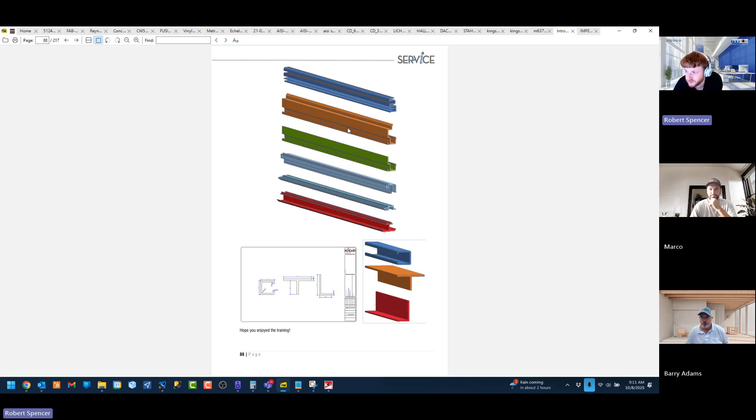Okay, so the last thing we did was we drew this very fine looking C profile and extruded it into something like this. Any chance you guys had the chance to draw anything else or try one of your own?

It's been since Friday, but I had a very busy Monday and Tuesday, and had a meeting right up till 9 o'clock this morning. It's no problem.

Okay, well what I want to start off with here before we move on to 3D stuff is importing. Let me find my example in your training documents, just a second.

So here in your training material for 2D, you're going to find a folder full of profiles. You can use these to practice if you want, or better yet, you probably got your own systems you wouldn't mind creating. But you can use them if you want.

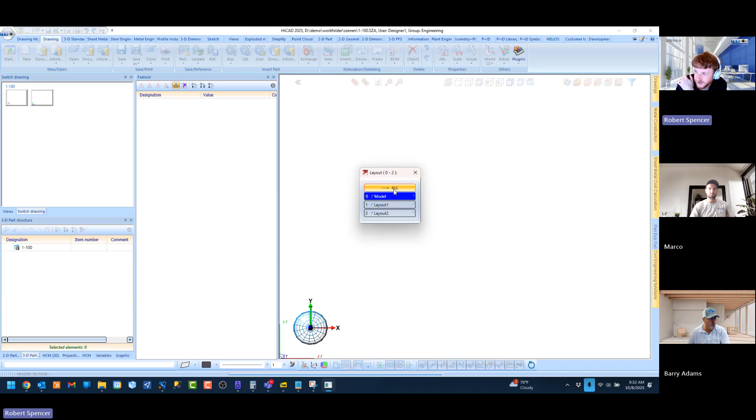I'm going to switch that back since I didn't mean to change anything - I think I clicked on something in there. I'm going to say okay, and it's going to ask you: do you want everything, just the model space, or all the sheets will be listed underneath here?

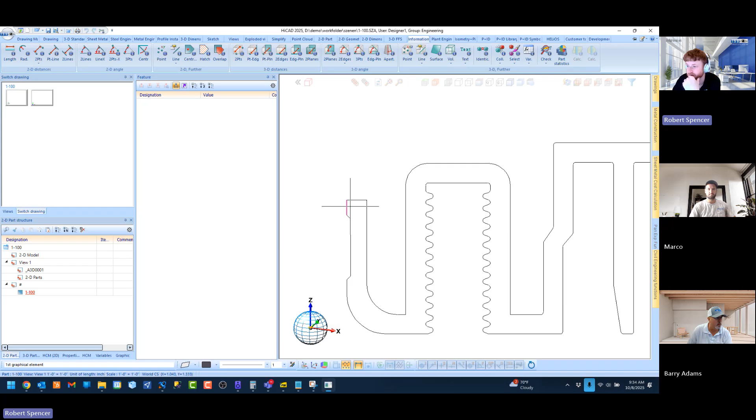Yeah, so I think it looks okay on my side. If I was to read something, I don't actually know the specs on this, but 1.5 sounds about okay. If it had said something like 0.00001 or some really small or really large number, then I'd know something was goofy.

Now from here, the steps are pretty similar to what we did last time. Who might have an idea on what we would do next? What are we trying to do? Oh, extrude that profile? We're trying to save it to the library and then, yes, basically extrude it.

Forget that, we'll do it. It was in sheet metal, right? Make it a part somehow. Steel - it's in steel. But what might we need to do first?

Gotta save the profile and import to the library. But what about the positioning? At least on my screen, that looks pretty whack. Yeah, get like a center point and centroid kind of thing. Oh yeah, we gotta do the centroid deal. We gotta move it to it.

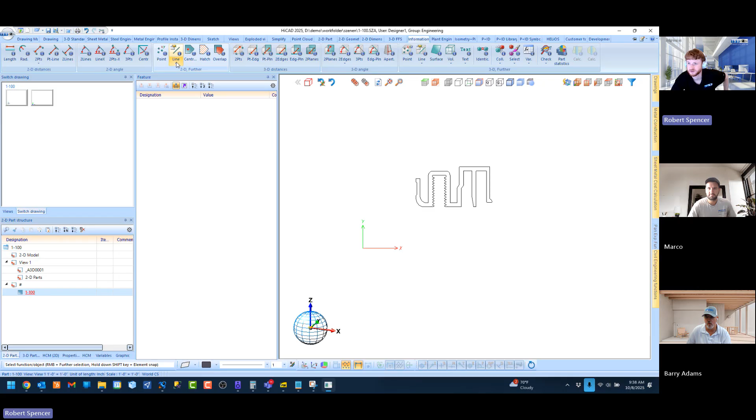So I'm pressing sort GE. I'm not seeing it - it doesn't look like it's checking for closed polyline or open, it doesn't give you feedback. The way to know is if it wasn't enclosed a minute ago, then you click the button and check it again - I bet it's closed now. Okay, so that's under 2D geometry. Correct, gotcha. And then you ran over to the information tab after that.

All right, so now we need to get this located near the zero. Correct, yep. And I don't remember - but at least on my screen, I want to rotate it first. So, who wants to try to rotate it without instruction?

In 2D geometry, see we got transform, rotate. Let's go over one more because we don't want to rotate just one line, we want to rotate the whole part. So transform is for one line - if you're in the 2D geometry ribbon, you're drawing lines, rectangles, and circles, or manipulating them. You're not working at a part level, you're working at an element level. When you move over to 2D part, you're now working at a part level - meaning moving a whole block, not just one line or two lines.

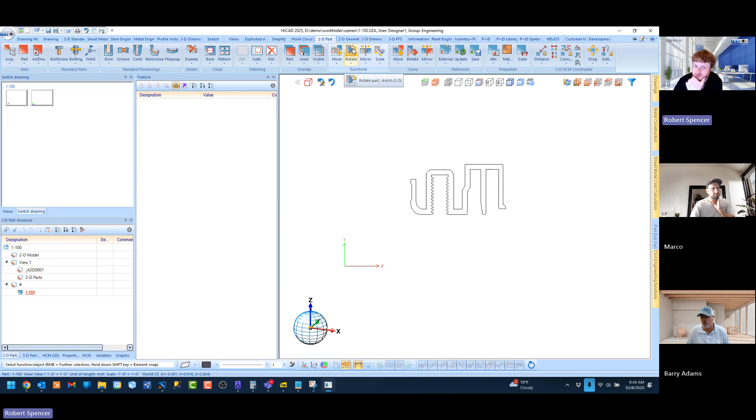So clone - well, not clone, we just want to move or copy this part. So here we got rotate, and here we can also use the right mouse button.

I'm stuck. I think I accidentally pressed move and I can't get out of the command. If you're in a command, try middle mouse or escape. Escape just brings up other options, middle mouse does the same thing.

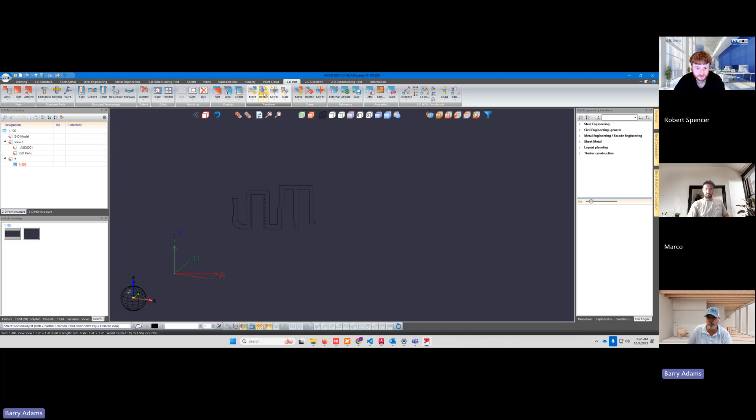Now we want to pick a point on which to rotate, right? An axis - yeah, just pick, it doesn't matter so much here. You just click a point and you can quickly flip it. Regardless of the point you select, it's just going to rotate about that, so here you just want to quickly move it.

I would put - so the way this profile works is that the teeth are going up and facing out, so I would put it like that. That's just because I happen to know how the profile system is used. So basically 180 degrees - no, just 90. You want to have it going about like that, so stop and just click that.

Yeah, all right, maybe next time I'll have this color coordinated better. I'm not good at color coordination. What do you mean, what about the color? So you can see I've got black on black for my options, so it's difficult for you to see. I can see it fine actually, but yeah, you can always change that if you don't like it.

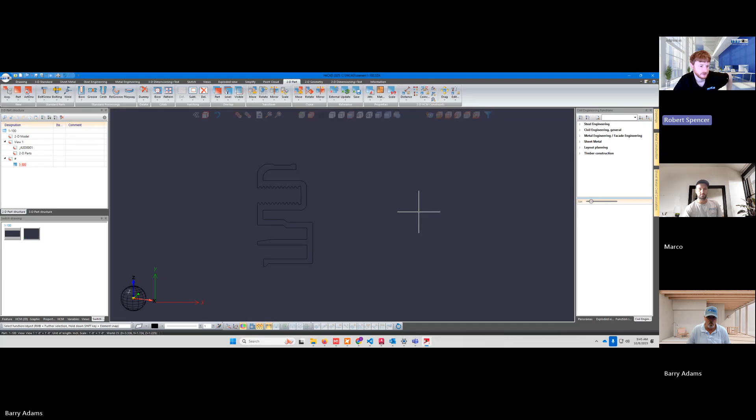Now, Barry, you got it rotated fine, but you're going to want to move it closer to the origin and probably have it in a strategic position. You can either pick your own choice of a position, or if you wanted to calculate the centroid, you could do it that way as well.

It'd be easier to calculate the centroid, wouldn't it? More proper anyway, right? Well, yes and no. I happen to know how this is used, and it becomes very convenient for inserting it into the model if I'm grabbing it by this point right here. That's right. You explained that last week, I remember.

Because, say for example, you have a flange going there and then over to here, and then of course they're going to be... okay, it doesn't like that because so many other lines are so close. So I'll just do this. So the top of the panel is here and the flange goes like this. So if I can grab it right there, it makes it easy to stick it right up in there in the 3D model. But that's just because I have experience with this.

I wouldn't have expected you to know that. Now, can we go in later after the fact? Like, let's say we do it by the centroid and we want to change it to the way you're doing it with a reference point out there in the middle of nowhere. We can do that after the fact and just resave it. You can go back in. You do have to resave it, but yes, that's fine.

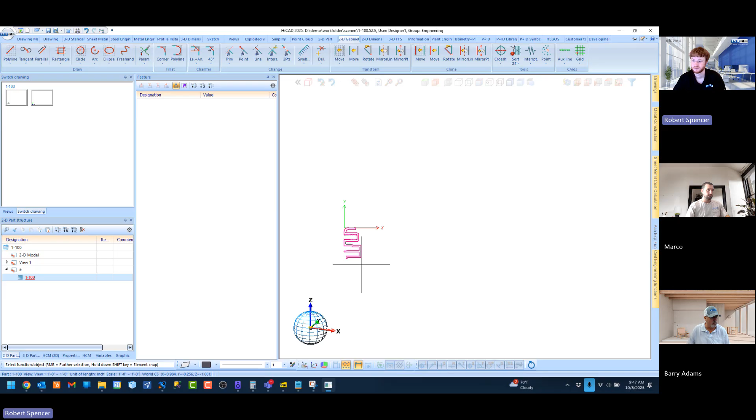Okay. So I'm going to take this one and I'm going to say transform again. And here I'm going to do a quick theoretical calculation to grab it right here in the corner. And then I'm going to use my A key on the keyboard to snap to the absolute position before I'm ready to save it.

Quick way to get to origin. What was that, Marco? What's the quick way to move it to the origin? Well, you start it with any type of transform. Yeah, I'll just grab it here, and then you hit A on the keyboard, and you can key in either 0, 0 or an offset from 0, 0.

Gotcha. How did you do it? You went over and left clicked on the 1/100, or right clicked on the 1/100? Move, yeah, I started transform here. Okay.

You can also click on the part. I like that, do it like this. You might see me come over to the structure more often than on the part, because sometimes in this case it's very simple, but if you have a lot of parts surrounding the one that you want to get, there's the risk of clicking on something other than what you're trying to click on. But if you're over in the structure, you can easily pick one particular part.

You're doing the transform move. And what'd you do after that? So if you got material sign and you got it moved into the correct position and everything is fully closed, you're ready to save it to the catalog. I'm still trying to move it. Oh, okay, no problem.

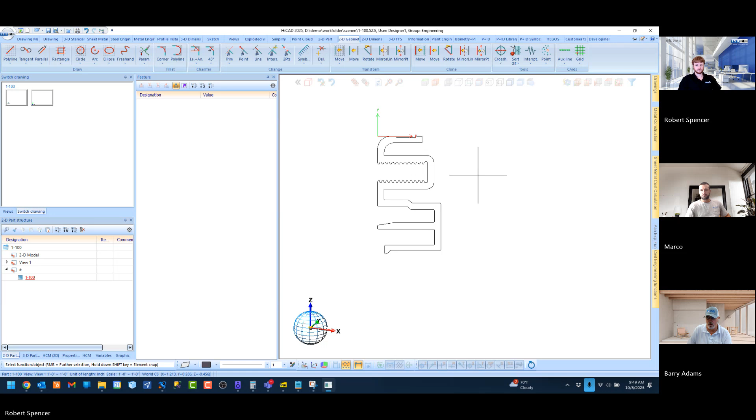So transform, move part, sketch 2D, and just pick a point and move it. Yeah, you can pick any point, but what I was saying is if you strategically grab it in a position, you can then line that up with the origin.

For example, I did a theoretical. Okay, you did a line there. I said theoretical, and I clicked... How did you get to that menu? Enter, when you hit... remember it's your enter options. Yeah, I remember there's an enter and a space bar one. Yeah, enter is for the options. Spacebar is usually to pull up like a key-in dialog, or if you want to type in a coordinate or a value or something like that.

Just gonna go. Just press A. Yeah. If you've already calculated your theoretical and you have the cursor grabbing it by where you want, then you can go right away to the A key, for example, and give it 0, 0, or if you had an offset value, you wanted it to be on the origin but a little bit to the right, because that helps you get it right in the position you want. You could also do that, but in this case, I'm just going with 0, 0.

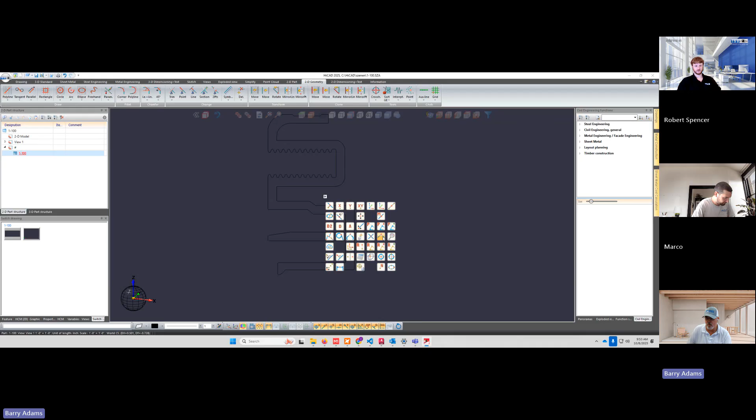And come over here to the theoretical intersection point, right? Correct, yep. And come over here, and I'm going to select this line, and then this line, and that gives me a point, and I don't know what to do from there. No, it doesn't give you a point, it means you're grabbing it by that theoretical point.

You're now moving it around with your cursor from that point. Now, you don't necessarily want to move your cursor. You see how it's blue? You're grabbing it by that point right now. Now you want that point you're grabbing it by to be on the origin. So you can go right away, you can hit A on the keyboard, which is the shortcut for absolute. And you can say 0, 0, enter. There.

Okay, so it's these procedures I've gotta get down. So I see how it's referenced from there now. I understand.

The first time I was doing something like this, I think it took me an hour and a half to find the centroid button, because I wasn't remembering to go to information. I was sitting here looking for it on 2D geometry or part or something. And since my trainer was in Europe, this was like 4 or 5 in the afternoon my time, so 11 p.m., I couldn't reach out during his evening. And everybody else had left the office, so I was literally just sitting there trying to find the button. Oh, so I know what you mean.

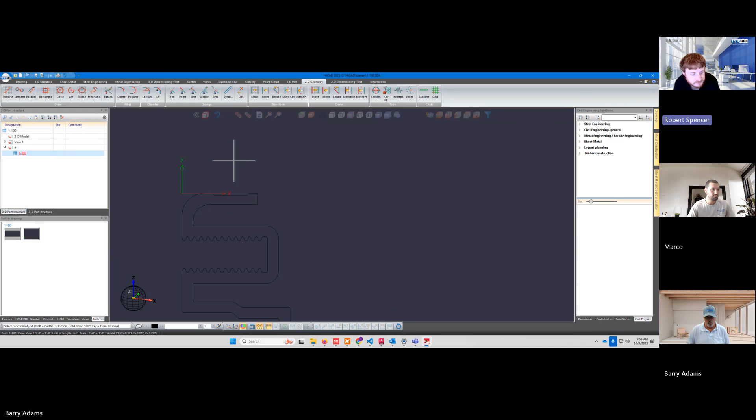Which, I have zero real life cladding experience either, but I think I've worked through enough projects with customers now that it's maybe not such a problem. But with the glazing, I'm just a little weak on the real world experience side. But I can tell you the commands. I just can't answer those questions, like hey I got this particular system I'm trying to create, and it works like this, and then they ask a really specific question on that particular system. I can tell you the command, but you gotta tell me exactly what you want to do. I can't help you on the ins and outs of your system.

I just got to remember to press enter. Yeah, I need to remember that too. Enter, when to press space.

I'm used to finding similar type commands either at the bottom of the screen near the snaps, or up in a toolbar. Maybe not so much under the enter.

Yeah, there's a lot. There's people that have been using AutoCAD for 30 years and they still don't know how to use all of it. There's enough there to keep you occupied for decades. This stuff's a lot. Correct, yeah, similar.

It's definitely a very powerful 2D tool, no doubt about it. Talking about 3D, their 3D is okay. We just try to automate. Our thing is automation, and Autodesk has Inventor, maybe a little bit of parametrics there.

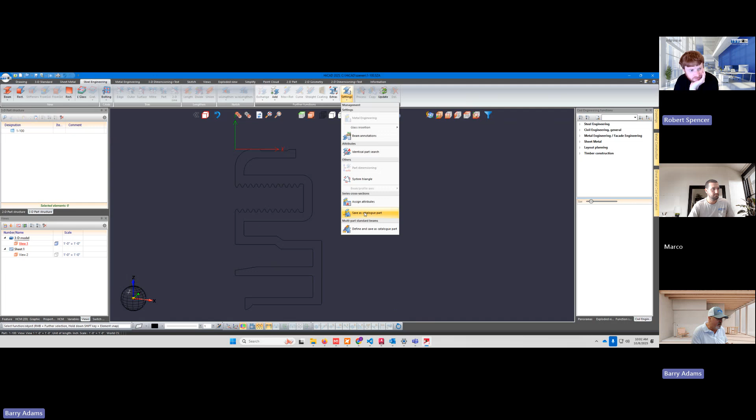And this is kind of a hard one. I remember struggling with this location a little bit myself, so I have to write it down. I would just probably write it down, and maybe you can write a quick procedure on how to save a profile to the catalog. I know I got the pages in the book, but you could shorten it a little bit to make it quick and easy to read. Simple, like 3-4 steps or something like that.

All right, so I did that. Hit the drop down, save as catalog part, all right, do it again. And look, it's talking to you. What's it saying at the bottom left? Well, select RMB, further selection. So do I need to highlight all of it? It's saying select part. Right mouse button will give you additional options, but really you just want to click on the part.

Okay, like that. Now remember the two different parts to the catalog. You've got the directories, and then you've got the database that manages the directories. Does that sound familiar? Yeah. So these are, the first part is the directories. So where would you like this part file to be saved?

And I believe last time we used the example folder, but here's where you could create a new directory later on when you're actually saving profiles you want to use in your work. You could organize with some special folders with whatever name sounds good to you. I say let's make it easy right now, fine with example. Let's just use the example folder. Yeah. Okay. Okay.

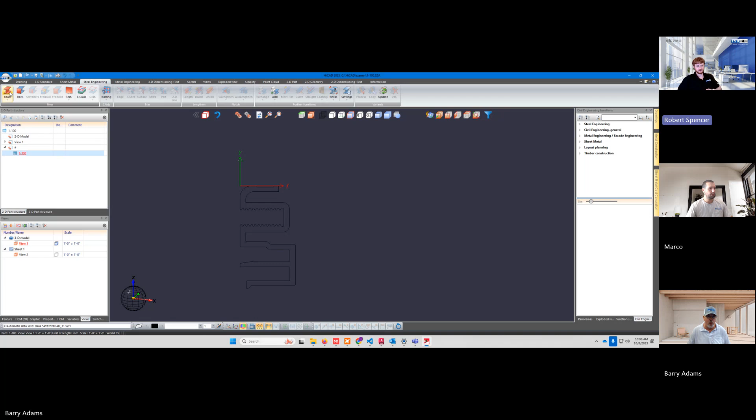Just hit the button. Oh, what happened? You have an HEA profile selected there - it's remembering. It's either a default or it's remembering what you might have done previously. I don't know exactly what you've done, but you just want to go find a different profile, right? You don't want an HEA 200.

You want to go one more button over, the little book looking thing, which means your library. Were you looking all the way up to the right of the HEA 200? Next to the arrow? Yeah, that one.

Now we have to find it. So I would start by collapsing everything. You see that button at the top left where it says collapse all? Your other right, yeah - collapse all, just collapse everything because we're not working with semi-finished beams and profiles.

So we want to go to, if you remember what table you saved it in a minute ago, it was in factory standards. You might not have noticed that. Factory beams, and then we're in series.

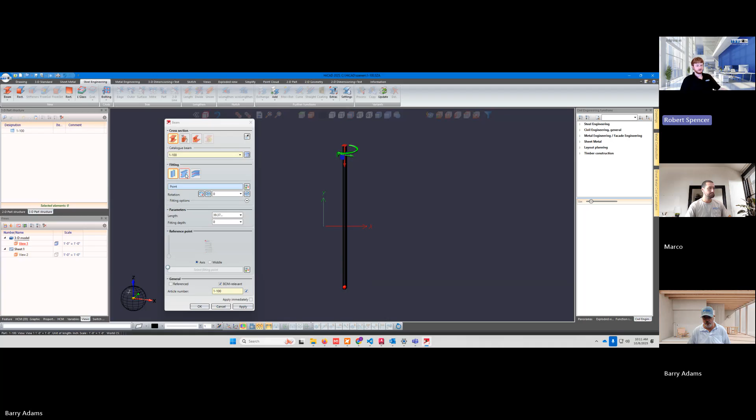Basically it's going to follow the Z plane, based on a standard world coordinate system, which is currently active. That's why you saw it being extruded straight up.

If you go to 2 points, now you need to give it 2 points. So I could select here for 1 point, the end point here. Actually, you don't have to necessarily click there—if you come out to your model space and click somewhere, or if you had a precise location, you could go to enter from point and click on something.

But now you see you got some snaps happening here. You got an angle system, which you can go down or to 0. If you wanted to key in a specific location, you could say spacebar—this is just for the angle, then you give it a distance.

Okay, distance then angle. So let's just say distance then angle, so 12 space 0. I think we're on 0 now—yeah, we're on 0. So that's the format right there: distance space angle, distance space angle. Okay, then hit OK.

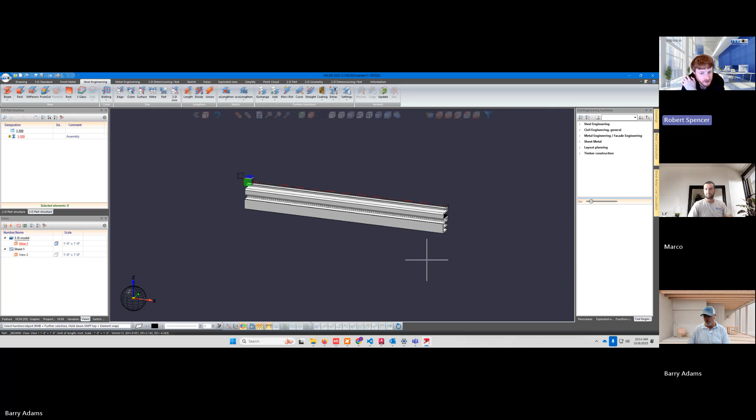So my suggestion here would be to find a few minutes whenever you can, either repeat this one, try one of those other profiles in the folder there, or better yet, try to find some of your own and maybe do an import and try to save something to your library. I start getting F-track and H-track assemblies in our library.

Yeah, I'm trying to manipulate this and just view—struggling with the view controls. Upper right, there's... yeah, that's the ones I like. Up here, yep, you can't just use your mouse and spin it around like... actually you can—you got to hold down middle mouse and rotate, and it'll rotate. Oh, I swear I was doing that. Oh, I was pressing shift and doing that.

Now, if you hold control and do that, you will pan. Okay, hold control. Okay, I like that. That's a good profile.

So yeah, that'll be something I try to do as soon as we're done here today. Okay, unless you want me to do it now. But yeah, that's a very important thing to do repetition on. Yeah, correct. No, I'd say if you find some time of your own, later is fine, and we can move on to some of the other things we got to talk about.

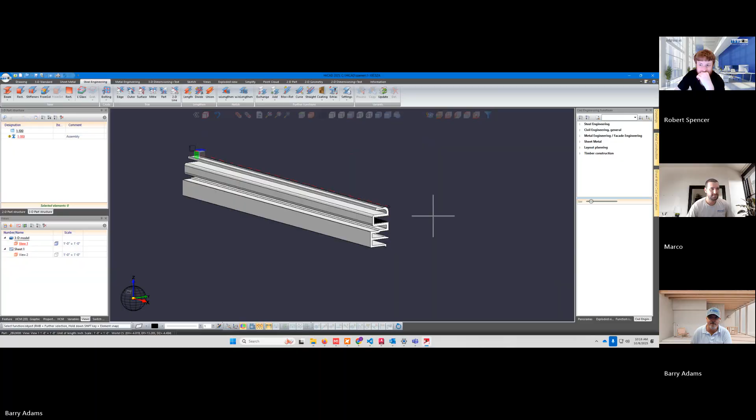All right, let's see, I think that kind of concludes the 2D portion. So let's move into 3D.

So for 3D, of course we're not going to be focusing on 2D part, 2D geometry, or dimensionings. We're going to have 3D standard, 3D dimensionings, or sketching.

So your basic commands for 3D are 3D standard, 3D dimensionings, or well, you got to create sketches, right? So for 3D, we have a whole ribbon bar for sketching, whereas for 2D, the equivalent is basically your 2D geometry in a way.

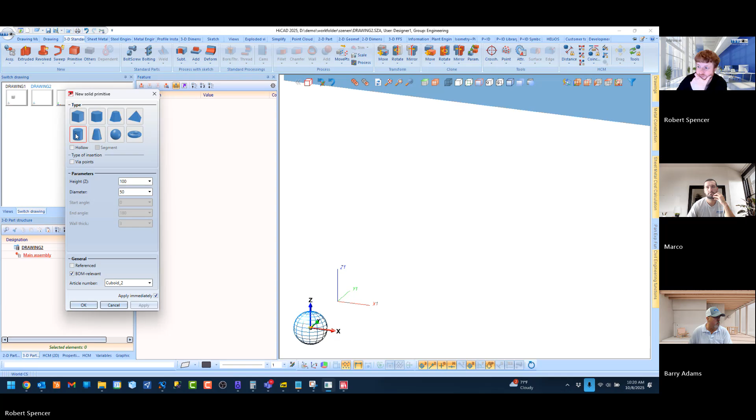I have a cube and a cylinder. So let's say if I want to just close this, I come up here and hit the close button.

You can also say close, but that's an extra click, so I like to use this one. Do you have that button there? If it's not there, we might need to add it. So you just say close, and it'll prompt you if you want to save it.

You can return to one of the other ones if you want. I've only got none, so I have to start a new one. Yeah, if you have nothing here, kind of like this, then we need to start new.

Okay, so we are going to create a very simple 3D part in drawing, kind of like we did a very simple 2D part in drawing.

To create this, you have two methods. You could go with the cube, like you've seen me do, and set the lengths here of 4 3/4 by 4 by 1.

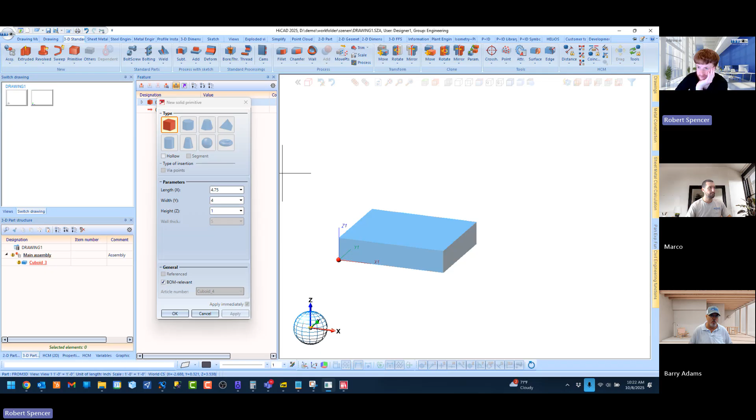So you can do it this way, which is okay, but I find myself maybe more prone to want to go to sketch.

Come over here, start a rectangle, say spacebar, and then say 4 3/4. Oh, I hit enter too fast. I'm a little bit slow.

Yeah, me too. I'm in Sketch. 3D Sketch? No, let me explain the difference.

This one is a 2D sketch in 3D space. This one is a 3D sketch in 3D space, meaning if you had a sweep, a unique sweep or something you wanted to do, you could go here. This allows you to, in the same sketch, work on the XY plane, YZ plane, or XZ plane. You can interchange back between the three standard planes.

Whereas this type of sketch, you pick one plane you want to click on, and then you can draft on that plane, for example.

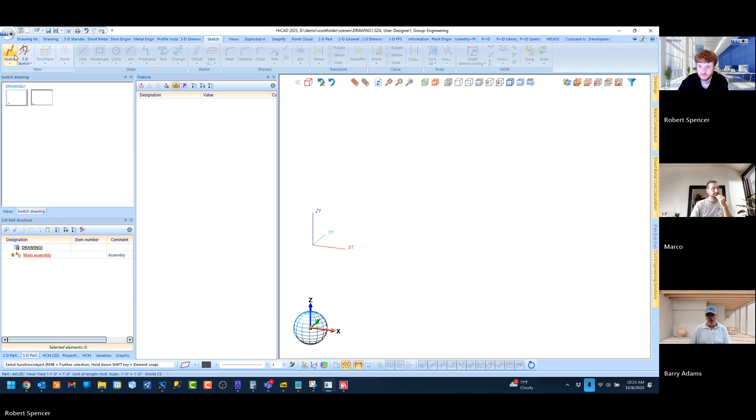Okay, there it is. Now everything gets populated. And say the XY plane here, and then your rectangle's right here.

So until you pick a plane, you may notice that your commands are not available, only create new sketches. Yeah, that's what I missed. So you gotta pick a plane and then pick your tool.

I'm gonna go ahead and create that, and rectangle, here's where you're typing in the space bar. Same thing, just like 2D, you hit space bar and key in the values. I'm pressing space bar, but I don't see anything. Oh, maybe I should.

All right, I've got a bunch of stuff going on here. Okay, you want to share? Sure.

I did pretty good, I think I got it drawn out both ways, cuboid and extruded. Yeah, I was trying to, hey, the space bar wasn't coming up. So can I delete all these and try again?

Yeah, so what you have now, look over at your structure. You have one sketch with two rectangles on it.

Now you could delete the sketch and start over, or you could just delete the rectangles and start over in the same sketch. I'm fine with that.

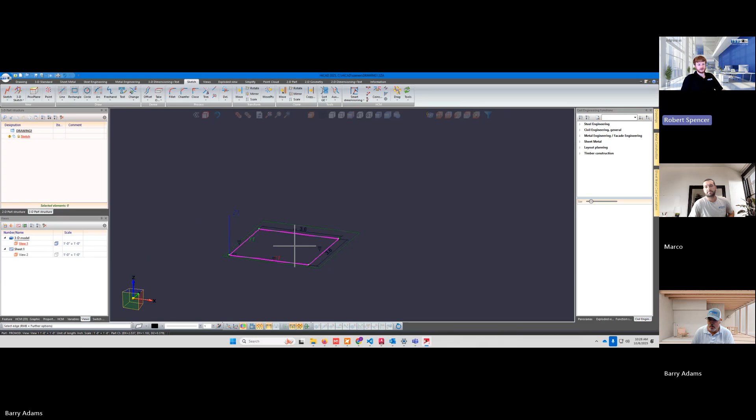Now you delete the whole thing just by clicking one line. Nice.

I don't know if you noticed in that same menu, there is also an option for deleting in a rectangle. So you could then drag a box around an area and delete the elements inside that.

So I'm looking at the plane I'm working on. So we're still have that. This is the, yep, right? You're looking at the plane with no elements drafted on it. So it's just a plane.

So rectangle. Now, I was going to start it right here at the zero. That's fine, and then come out like this. I was trying to hit the space bar. Do I hit it now before I left click, or do I left click and then hit space bar? No, you don't click at all, you just hit the space bar. That's what I was missing.

All right, so we're going to do, what did you have? 4.5? 5.4? 4.75 and 4. Space 4. Why does it say 5.1? Oh, that's where mine, for sure. I think that's where your cursor was.

Let's escape out of the commands now. Escape or middle mouse? Okay, middle mouse. All right, so there it is. I've got 4.75 by 4.

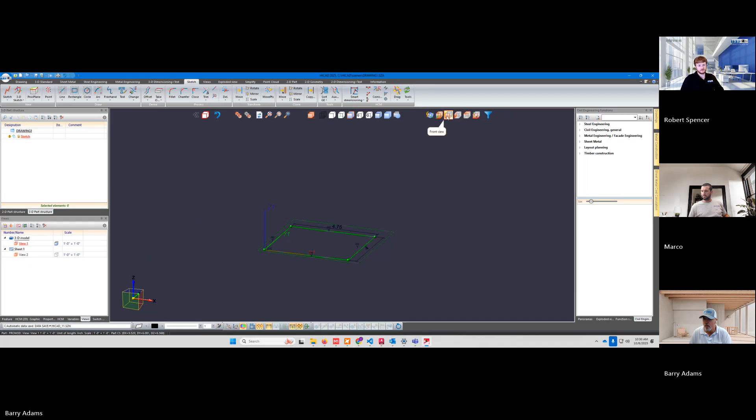So just click them one by one real quick so you can see what they do. So this now is front view. Since our plane is on the XY plane, we're looking into the X. It was the XZ vantage point, the XZ plane at that moment.

One of these? Well, I'm not sure what you're trying to do. What are you wanting to do? Whatever you want me to do. Oh, well, we're just going to continue modeling by extruding this into a part. Okay, yeah, I would like an ISO view. Okay, so the button to the right of that. Okay, got it.

All right, you good over there, Marco? Yep. Got my cuboid, okay.

In 3D standard, maybe you already found it, but the extrude button is right here. You're in 3D standard, correct? I actually just right click the part, and I think there was an extrude on there as well. Yeah, would it be under transform? No, that's under one right there, new? Is what I used. Yeah. Okay, I see. Yeah, you can do it this way too, that's even easier. That's what I thought.

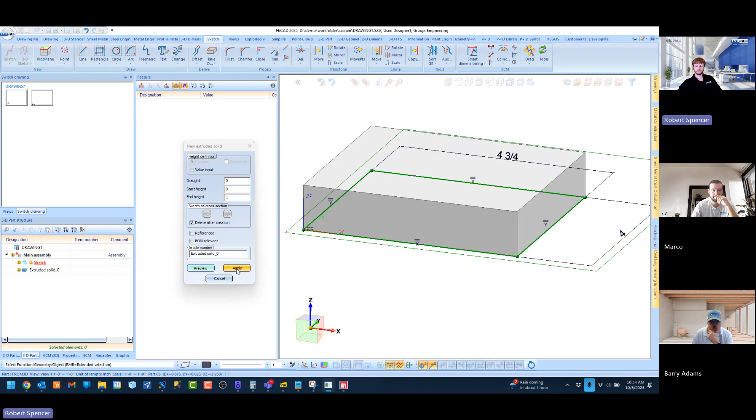Okay. And you see you get a feature step now.

Yeah, I'm not seeing that third window that you've got. Well, I had it down here with everything else, and I wanted to have it here, so I just dragged it over. The reason is while this is a simple model, we'll have a few steps by the time we're done, but when you get to building a parametric facade, you're going to have hundreds of steps here. If we're doing it right, this list will start to get long on you. So that's why I opt for this most of the time.

Now, you can return to this. There's a couple ways to edit this. Notice that when you click on the feature step, these parameter values can be double clicked and changed.

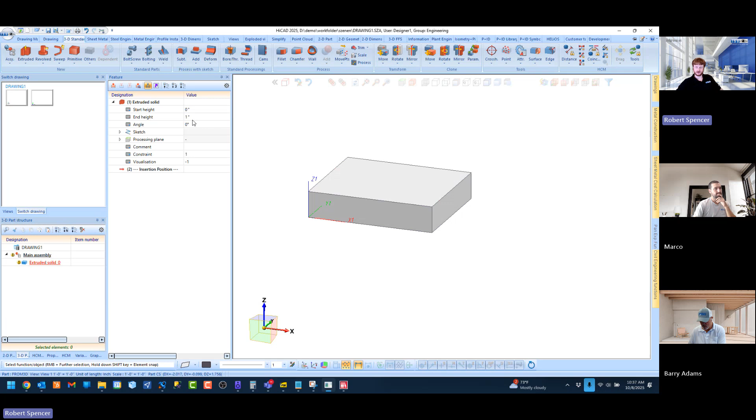Now, let's say these parameters were not created when you made the sketch. I'm going to double click this sketch to come back to it. Let's say I created sort of a dumb sketch without any constraints or values. It still builds the part, but when you highlight this, you see those values don't appear, because they were not created. If you don't create these constraints in the sketch, then you don't see these values. You see how now the length and height are gone.

You can always double click your sketch to come back in and, for example, create them with Smart Dimension if you hadn't created it before. So in order to highlight the feature and actually see values, you would have had to create your sketch using Smart Dimensioning for those values to be available, is what I'm trying to say.

I think I lost my values. My wife tells me that all the time. But seriously, I lost my values.

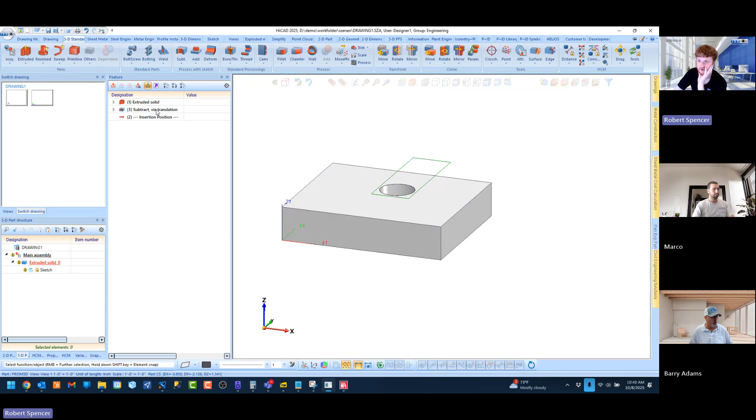It's a hole, not necessarily a bore. We have more capabilities by using the bore command instead of just the hole, because you've got all these different things you could do: threading, countersinking, counterboring, slots, and you can reference standards if you want to. Whereas a subtract is just a dumb hole, basically. Using the bore, you have a smarter command behind it.

And when you go to do your annotations on your drawing, a bore is going to give you a diameter symbol, whereas a subtract will just give you a value of the width of that hole, the diameter. But a bore will give you diameter and depth.

Yes, I believe so, because there'll be a depth associated with it. The bore you can also say not necessarily all the way through—you can also say subtract with depth too. So you've got two subtracts: subtract all the way through, and subtract with some kind of depth value.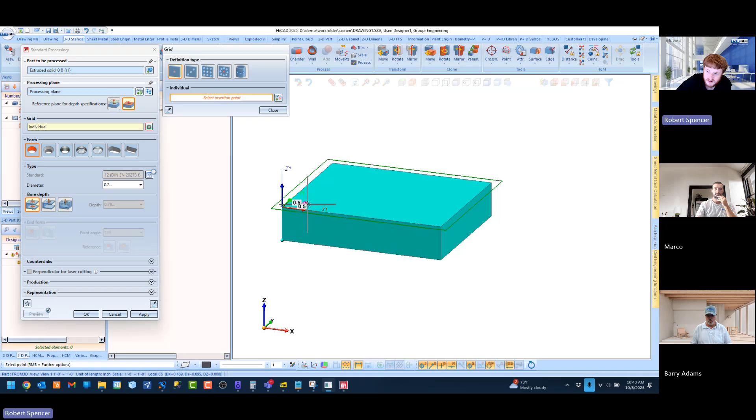I tend to always want to place this at the bottom left—I want the X going left to right, and typically the Y going bottom to top. However, you can take your pick, you can do it like this if you want to. No, I like the way you've got it—yeah, it makes the most sense to me. So you can click that.

And now it's asking for a location, X and Y. So I have one hole as my selected type here. Notice you've got lots of different, we'll say, arrays or definition types here, or I could come over here to say a grid—some type of grid here—and you see now I'm seeing four in my preview. Obviously not to the right specification, but it is starting to respond.

Here's where you could say 2 in the X, 2 in the Y—that is correct to what we want, I just don't have the right distances in yet. Here's where you can set your pattern. Is that creating the pattern here? Okay, so let me look at the drawing—2 and 3/4 in the X is what we want.

So now it fits, at least in that direction, on our part. And now we just need to say down here, I believe it's 2 in the Y. We want that pattern, and we're going to go 2 and 3/4, and 2.

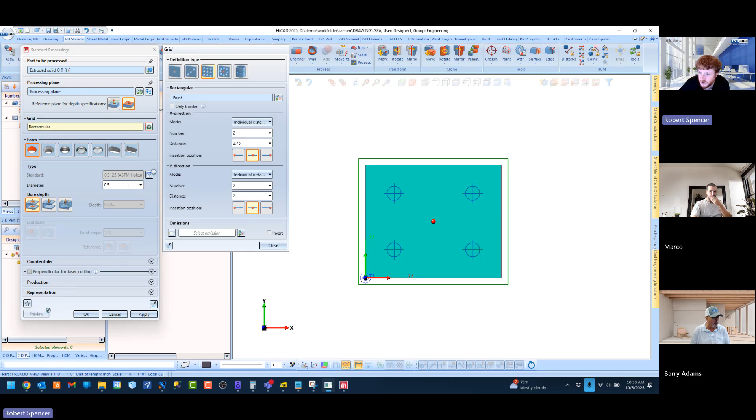And you see the preview is adjusting per the input here. So once we have everything right, all we need to do is say apply, middle mouse, or OK. And the holes will be created and a feature step will be added to our list.

All right. And as is typical, you can return by double clicking. You can come back into this dialog.

What are you double clicking? I'm double clicking on the feature step that was created. Oh, your feature step, gotcha. Yeah, you just double click and you return.

You can also expand, and here, for example, here's your value. If you wanted to say, no, I wanted it to be 5/8 instead. Okay, I like that.

You'll find that I'm expanding this to find something before double clicking in most situations, because usually it's just one value I want to change, which is usually not so buried, depending on the complexity of the feature step. You see here even a little bit like the values, but things are starting to get a little bit buried here.

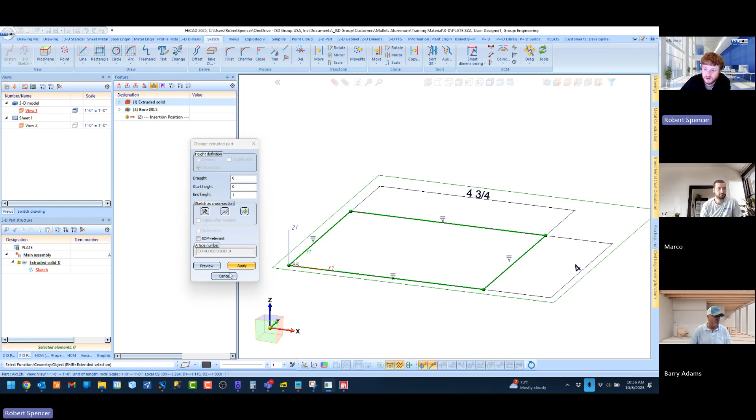We kind of breezed past this when we started. Before you create it, you could give it a unique article number rather than just extruded solid 0. If you've already created it, you can simply come over here, double click, and you can change it to say plate or something better, something more appropriate than just extruded solid 1 or whatever.

Okay, let's now, you mentioned thread a minute ago, because now we actually want to put, I believe it's 1/2 13 thread here right in the middle. So we're gonna go right back to this multifunction command, bores and threads, that we just used a moment ago.

And you can get that via right mouse button, or you can also find it up here in your ribbon. I like that right mouse button. Yeah, I do too. First thing you do, let's pick a plane, it's going to be the same one we did before, this time we're going to come over to this form, or this type.

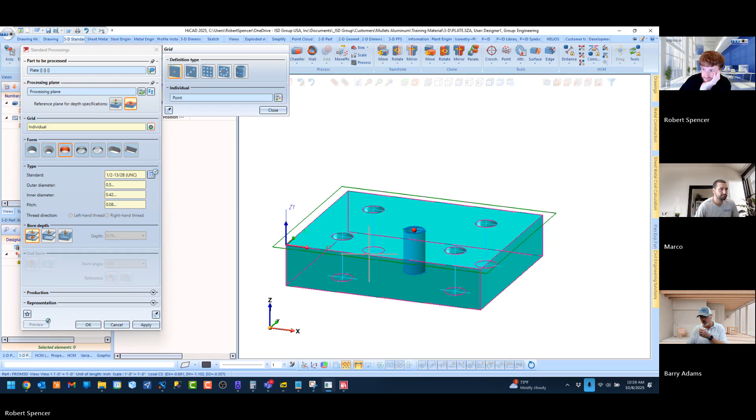Nice, and you could say apply, okay, or middle mouse button a couple of times. That is so cool. With a standard thread.

Okay, let's see, any questions so far? I think you probably asked them as you go. No, I'm pretty good. Might have information overload if I don't get on this stuff right away.

Yeah, for the most part, I think our 3D commands are pretty somewhat similar to SolidWorks, Inventor, whatever else. Especially this menu.

Now here's something that maybe it's not in this example, but I want to show you because this is different from SolidWorks. Let's say you wanted to add a boss onto this, another extrusion for example. If you were to do this like SolidWorks and you put a sketch and then maybe you put a rectangle here.

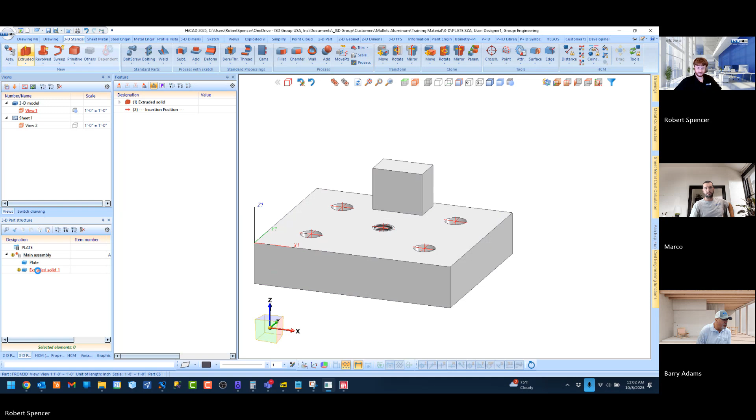If you now said extrude and gave this some kind of height, watch what happens. First off, I should have deleted my sketch, but you see what happened here? We have two parts. Didn't you need to make another part, a whole different separate part? Well, if you did this in SolidWorks, you simply do another extrude on this part and it combines it with the part you already have, right? It becomes part of that part.

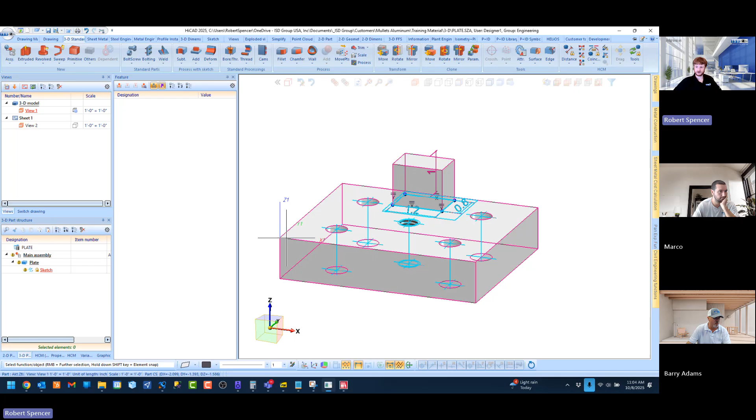One more time. Here's another reason why I usually access add here, because you're activating the correct part as you're calling the command. Whereas what I was doing a minute ago, I wasn't paying close attention to what I was doing. Now I give this kind of value — I did that by right clicking on the part. Did it already make it? It made it. I did that by right clicking on the part here and saying add. So now look at what happened here. Now we have a feature step for add, and we still have one part in the structure. So this boss is now part of this part because I used add, not extrude.

This is one of the main differences that SolidWorks or Inventor people just aren't used to. When you're building one part at a time, of course another extrude is going to add it to the part you're currently working on. But since you can do multiple parts, assemblies, and drawings in the same platform, we had to differentiate between adding and just extruding a new solid rather than adding to the existing solid. Does that make sense? Yeah, okay.

All right, so what else have we got on this little thing? I think we can now start making the sheet, something like this. This is page 109.

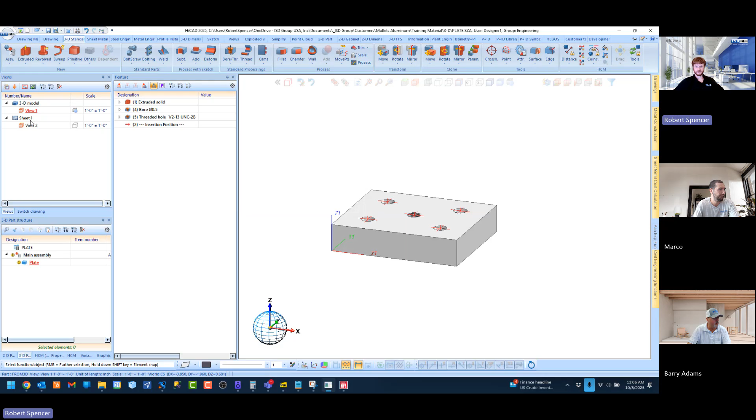Remember from some of the intro demos, we now have model space and we have sheet space. So you've got model space and sheet space, and while they might look different, a view is automatically created here in sheet space. This really is nothing different looking than what we have in model space, other than the zoom previously. So you see there's no real difference between this in model space and this in sheet space.

And here's where you can create multiple views. So if we're trying to make something like this, we're going to need to add three more views and some dimensioning. In my opinion, the first thing I do is add my frame, because I don't know what scale I want these sheet views to be. Right now it's 1:1, but if I add a frame of maybe ANSI B — actually this scale works out pretty well, but I didn't necessarily know that. Let's say I did ANSI A, then I'd probably need to do a little bit of scaling. Even though this worked out for us this time, most likely when preparing a drawing sheet of a facade or a profile or whatever you're doing, you're probably going to need to scale your views for your sheet space.

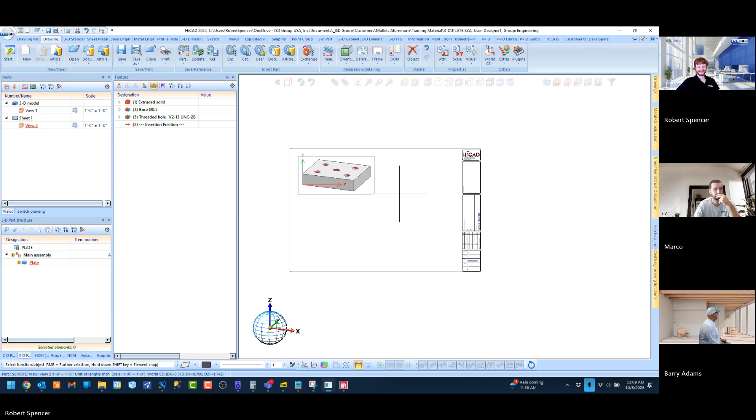Oh yeah. Yeah, send me what you got, even if it's anything. Perfect, thank you. Okay, sorry about that. No problem, I know you're talking to somebody standing there, but the way it only shows a certain amount of info on the call, it looks like you're standing there talking to a ghost because there's nobody in the view. It was kind of funny. Sorry about that.

I'm actually not, I moved over to sheet space, and your view is probably going to look something like this when you move over to sheet space. So what I was showing a minute ago, while it might look different, is absolutely no different from what we had in model space. It just had a new view created, being shown to you in stick view and top, when we were working in isometric and shaded 3D. Same thing.

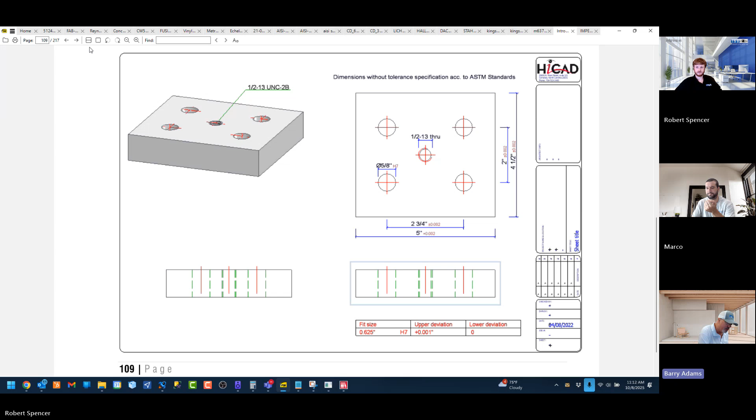Well, this is at page 109, right? I don't need to write all this down. Write all what down? What we're doing - I think you said page 109 is where this begins. Well, 109 is where the drawing is. It's not going to show you how to add a frame, because we've already covered how to add a frame previously. Oh, okay, all right. I mean, I better actually write this down - let's see, it might actually cover adding a frame, but I don't think it does.

No, well, there you go, you need to update it. There's your reason right there. We just covered that, exposed the flaw. We covered that in 2D, so you should already know how to add a frame. We exposed my flaw.

So it's a sheet view, and it's a frame under drawing. Got it.

All right, which one do we want - din, ANSI, or arch? I'm gonna go with ANSI B, I think. Okay. What size is ANSI B? I think it's about 11 by 17. Okay.

Now I gotta place it. Yeah, now you can place it anywhere really, but I usually just try to align it with one of the views. But you can always move your views after, so it kind of doesn't matter so much. But I like how this drawing attributes box pops up - you could populate everything right there.

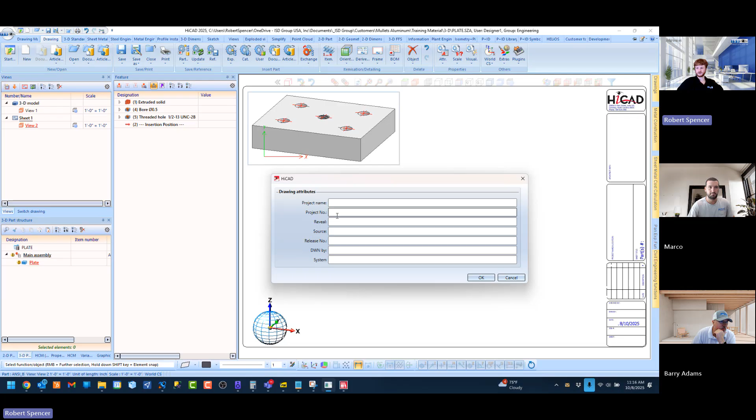This is mine, it's 100% customizable. So you got yours - this can be changed to anything you want. So this is what I have loaded - I believe this is another customer I was working with recently. What you probably saw was the full one. I can actually change this quickly, but I know this is gonna be way too much - this particular file is the one.

I'm going to switch these, so now this file is active. So when I hit OK, I get something different now.

So how do we customize that, or can we? That's something we'll work together on. Which reminds me, if you have some example title blocks for shop drawings or fab tickets or whatever you're thinking there, if you send those over in DWG format, that's something I can start thinking about.

Will that cost us a couple extra? I can go about it different ways. I could either just prepare it for you and install it for you, and then you have it. Or some people want to actually know how it works, so they might like a session describing how it can be prepared and how that can be customized.

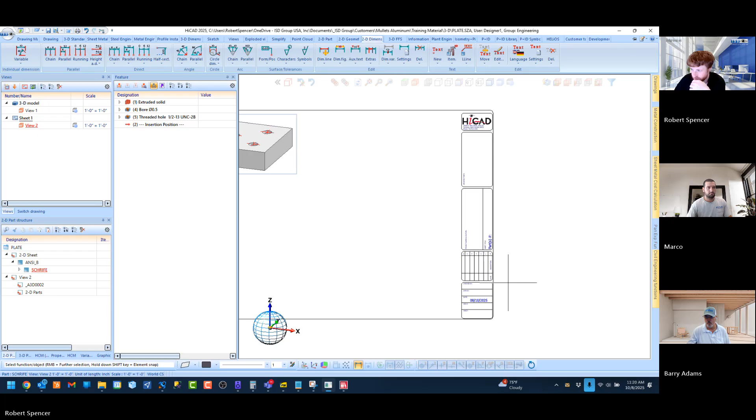So this would be the same on your computer if you're using the ANSI B. Some customers, and you by no means have to do this, take what we already have here and add their logo and change it a little bit. Other people have something that looks very different, but also rather nice, and they want to do it that way, and that's just fine too.

If I have a note, I'll send you our title block. Let me at least look at it - even that doesn't mean it's set in stone, because it's also very easy to change. So let me just look at it, and maybe I'll throw it in here real quick and have something prepared, but maybe not 100%. You can still talk with your people and decide what you want to do. That's no problem.

Alright, so we want to continue working on this sheet, and we have one view, but we need additional views here on this page. In my opinion, the easiest way to add a new view is using this new view command. It's actually pretty cool, but I'll show you this, and then I'll show you what I usually do instead.

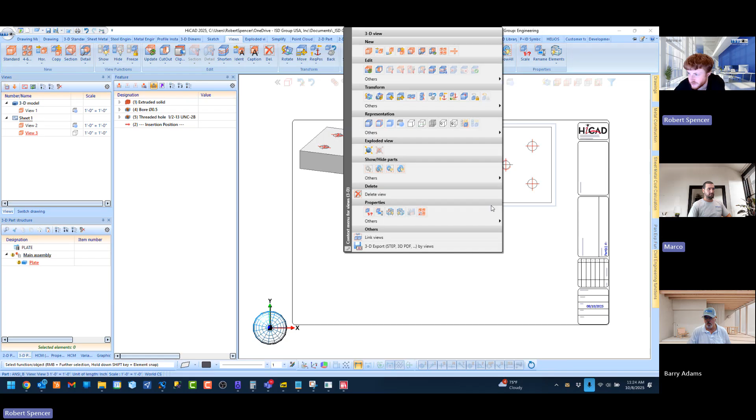But it's kind of the same thing. Did you catch that? I do this again - copy, and then you have to hit like top. So I just view, copied it.

And now it's just in the model, identical to this one. And now if I'm trying to create a view that looks like this, for example, then I just need to change the vantage point and the representation. And I already have the view that I was wanting.

Where do you click to drag it around? Left click, you just click, hold - you see the dashed lines? When the dashed lines appear, that's when you click. You see, like now, it thinks I'm trying to zoom. But when the dashed lines appear, you're now clicking on the view.

Oh, all right, click the hole - it's not like that. I gotta click on the box. I got that. Beautiful, got it, alright. Got it, Barry?

I did, yeah, I've got it. I didn't use your copy way though, I stayed with the first way. Okay, yeah, I understand that. Okay.

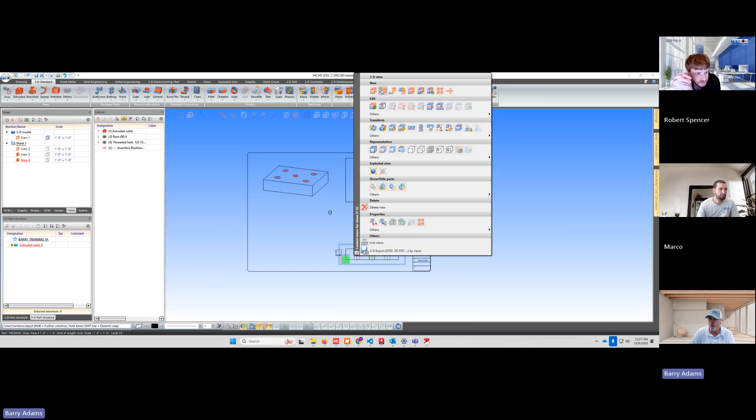All right, try it like that. Yeah, all right, that's better. The only thing you got to be careful with there is, are you clicking on a view or the part? Right. And now we're okay, this is great. Yeah, I like that.

I'm trying to escape out. For views, it's a command, but it's not really a feature. So typically a view command is a one and done type of deal. Trying to think if there's an exception - I can't think of one at the moment.

So if I want to slide these up a little bit more on the page, will they move together? Do I have to tag them both? No, since you derived one from the other, the derived ones are going to move together. Go ahead and try it - pick that one that you're closest to and try to drag it up.

Not the part, but the view. There you go. So, oh okay, did it really not go up? I think I know why. Yeah.

Okay, I had to pick up the first one, this one over here, because you projected down and then across.

When you derive a view from another view, they automatically link them together, which can be nice. It can also be irritating depending on what you're trying to do. You can link them and you can also unlink them.

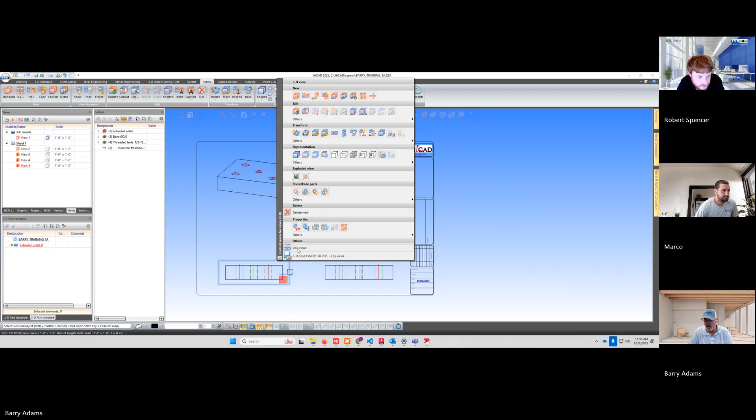So let's say you wanted to unlink that bottom left one for some reason. If you right click on the view, you see almost at the bottom, link views. You click that, and then say delete the link. There's where you can manually link to another view, but here's where you can also delete the link.

Now drag that one — it can move around individually. Now you can do anything you want to do. And notice that it will still help you align it back up to that first one, still snap right back in.

I like that. That's recent, actually, maybe 2023 or 2024. Before those versions, you could move it, but you had no real indication of whether you're aligning it with another one. So they're always trying to find new ways to improve things.

So speaking of that, right before we signed on, you guys were releasing the latest and greatest update — point something, 2.3 as opposed to 2.2. That's a patch, so those were bug fixes.

That were identified and submitted between 2.2 and further, so that can certainly be installed.

Here's just a couple of tips and suggestions. We're real picky about versions. So if you install that version right now, it's going to tell you that your catalog, which manages your library parts, and your configuration, which manages your settings, are not going to be in the correct version anymore. They have to be versioned to match the software version. Is that hard? No, but there are steps that need to be taken, and you need to be shown.

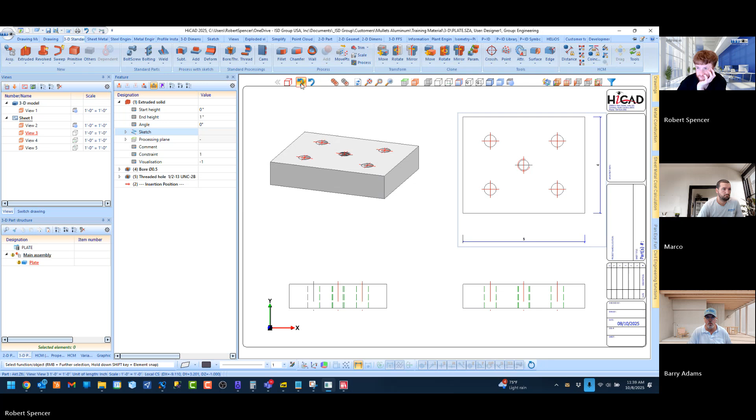I wouldn't mind going in there just so I know how to do it. Yeah, so go back into sketch. I'm going to come back to the feature step here, expand it, and double click on sketch. There we go - and it looks kind of funny because all views are doing the same thing, which is what you want. Actually, you want everything to sync together. But here I only need to change this value to 5.

So I double click to go to the original value, and just change it to 5, and apply. And that changed it - everywhere, of course.

So if we could make the dimension text bigger a little bit and see how we can move the dimension after the fact - that's really cool. How do we get those offsets closer? We just got to move it closer. I'm talking about the dimension line offsets, like these, from the line. How do we get those like a fixed setting? That's going to be a setting.

And just like 2D, you can double click on the dimension, and it's going to bring you into - this is kind of like your auxiliary text menu in 2D. I remember you could do one, or you could set up like a dim style rule. You can do one by one, or you could change everything globally by going to 3D dimensions and hitting Dimensions, and that'll set the rules right there. One thing you'll notice is that this menu has far more options to configure than the 2D menu.

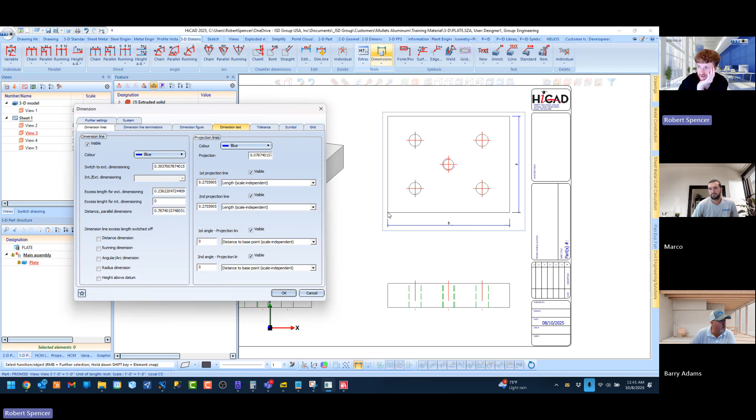So here you're talking about projection lines, and it's in this first menu. Where were you wanting this line to go, all the way back to the part, or did you want it maybe just a 16th off the reference point, or an eighth, probably 16th?

Let's see, we've got some different options in here. We can say unshortened, we can say length, we can say distance to base point, or scale independent. That kind of might sound like what you're looking for.

Let's see, you've got dimension lines. I'm in dimension lines, which is probably the first one you're looking at.

Distance to base point - where were you? On the second projection line. Is that what you had? Distance to base point, scale independent, yeah. All right, so let's see how that goes.

Let's see what that does. There's no preview here, so what I'm doing now is applying it globally moving forward.

Which is why sometimes, because let's say I want to do it just for one, so let me show you something. If I double click, it brings you to this, in which case you can click this to change the parameters, and it opens up.

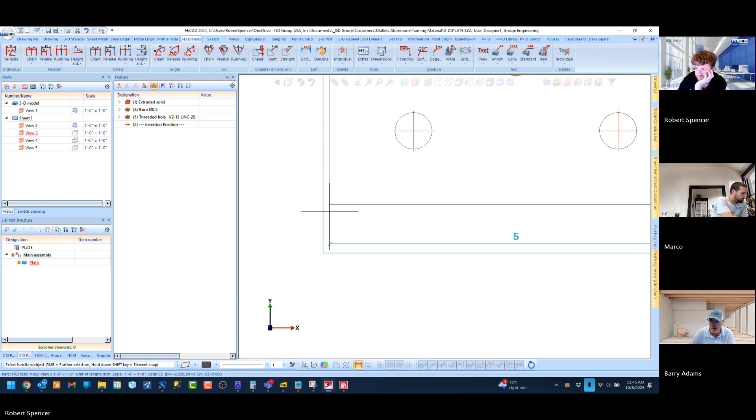Now let's see, yeah okay, it might do it on new dimensions. Okay, yours is there, mine's not, mine didn't take effect.

I applied it to this one only. Okay, I thought I was doing - okay, no, I'm sorry, it did work, I'm trying to manipulate the wrong one. Oh okay, it did work for that one.

So we would just need to do the same thing globally, right? If you're happy with that. Yeah, that's what I'd like, because a lot of guys will think something's okay, then they'll say, well, I can't tell what it's pointing to.

Well, here's what I wanted to show you. If you're happy with one, looky here - save as favorite. And here you could say, you know, Mullets standard or whatever.

Now here's what I do. I have one for imperial decimal, imperial fractions, and then metric, because I'm always bouncing back and forth. I do have some customers in Canada and Mexico that actually use metric, so I have these three prepared and ready to go so I can jump around.

So those are your stored favorites right there. Is that what you're saying? Yes, these are the ones that I have here.

Okay, so for you, you could say mullets standard. I don't know if you're going to start with decimal or fractions, I don't know, but you could take your pick here - Mullet standards, decimal.

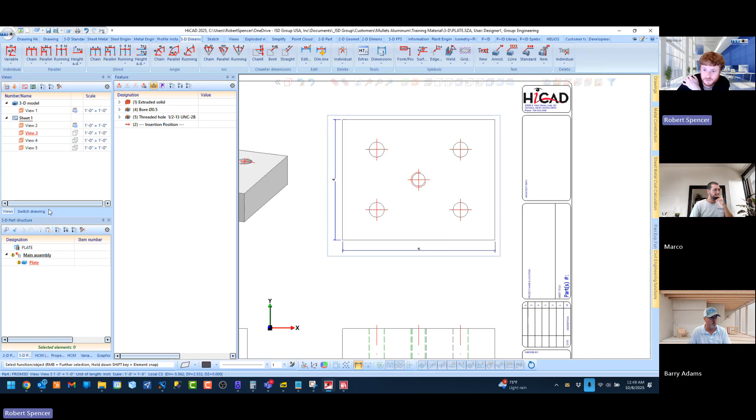To me this was a very strange concept, the settings saving to the drawings. Here's what I would do: I would save something here, do my drawing, then come out to my next drawing and start drafting and do dimensioning, and I would say, huh, how come this is behaving differently than what I just set up? That's because it was with this drawing only, not all drawings.

So how do you apply to all drawings? If you've got a standard that you want to be global for all drawings, you need to hit this button and hit save parameters. It will save these to your settings configuration, which will then be the standard for all drawings moving forward.

All right, something changed on mine. We're good on those offset points. However, my for the 4-inch, the dimension figure - I can't move it. It's stuck on the very end now, and I don't remember changing it. I like it to be centered in that.

Let me share my screen. Is that all right? Yeah, that's fine. So I'm talking about this dimension right here.

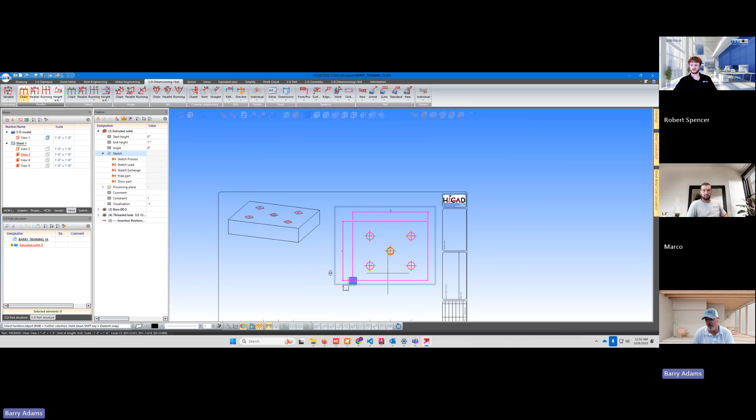We're gonna go variable, I'm gonna come over here, grab this. See how it's at the very end now? And I left click and there it's stuck there. So I go to grab it and move it and it won't. So I escape the command and then I can grab and move it. Does that make sense? That's what's happening, but no, it doesn't make sense. Huh, I'm gonna delete this again.

Let's see, okay, so variable. Mine's doing that too all of a sudden, and I've actually never seen it do that before. Wow, what is going on?

All right, let me play for a minute here. You want control? I'll just play on. I actually can't - you guys have something going on in your Teams settings where take control is grayed out. You see it up top? Oh, that's right, yeah.

All right, why might it be doing that? So I left click, I'm not holding it down, I just clicked once, bringing it out. I'm going to left click - see where that 4 is still stuck there. I'm just going to left click right here, and I'm still in the command. You would think because I'm still in the command I'd be able to grab that 4 and slide it, but I can't. So I have to escape, and then I can grab the 4 and slide it.

It's something we did in the settings, let's see - because when I switch back to one of my defaults, that doesn't happen. So let's see, change parameter individually. All I did was change these: the first projection line and second projection line.

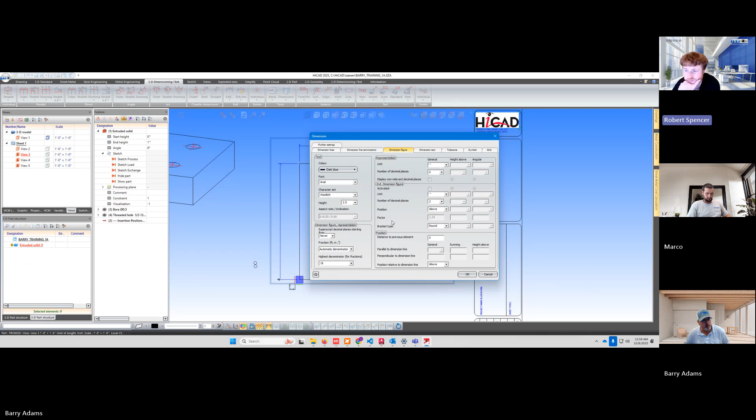Let's see if we change this back to unshortened or something. You would think it would be under dimension figure - interior, exterior, excess length. But other than dragging it, I wasn't aware of a left to right option. It's almost like in Word when you pick left align, right align, or center align. Yeah, justification - yeah, justification, thank you.

You know, it may not even do that next time I restart. Well, that's what I'm wondering. It's almost like a glitch, I don't know, it could be a bug. Might go back to normal, or a temporary glitch. Yeah, 'cause this thing is so robust.

I'm looking at this thing - there's got to be a million lines of code to this program. Oh, for sure. And maybe, you know, maybe you didn't - it's not a standard programming language, it's their programming language, so they created their own kernel. It's so insane, developers for us - we hire knowledgeable people, but still they come in, even if they've been programming for 50 some years, they know nothing because they don't know this particular language.

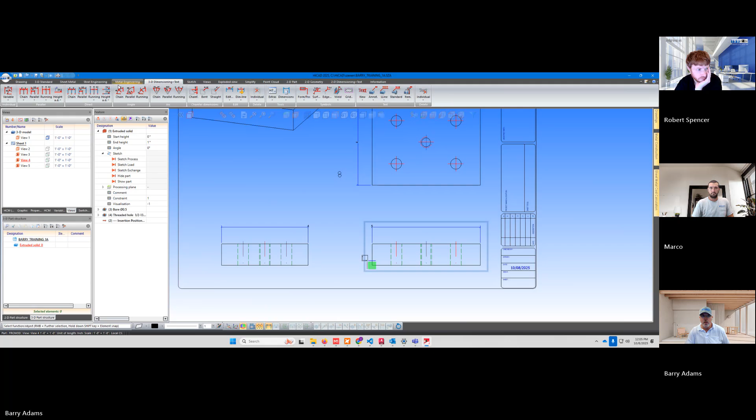I think it's this one. They're still in the same place, but I don't know if it's going to work. Let's try a new one. Try creating a new dimension, the dimension variable, coming off of here. Why is it doing that?

Still doing it. What's wrong with the computer, Barry? What about you, Marco? You getting anything interesting? No, mine's all pretty normal.

He never changed his base standard offset. No, yeah, he's still measuring from that. I did change the base offset, but I didn't save any favorites or anything.

Yeah, I got some defaults I can fall back on. You don't yet. Can I just delete the favorite? Yeah, do this, delete the favorite. Yeah, that's a good idea. I got a good idea. Delete the favorite.

Okay, now you didn't hit that save parameters yet, did you? No, to make it global. No, I did not. So let's go to a new drawing.

A new drawing, you said? Yeah, just start a blank drawing. You don't have to close this one though. Say cancel. Shit, it closed it.

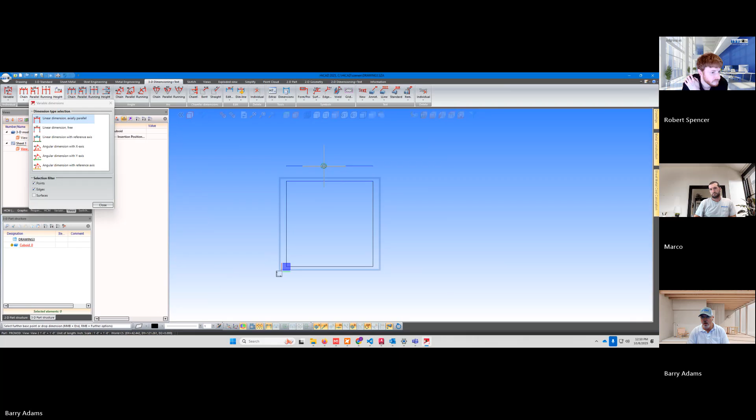Yeah, so just place that somewhere. I know it's small, that's okay, we haven't scaled anything. Just now go zoom in on that dimension. You can probably see it, double click the dimension anywhere on the line to end the command. Hmm, and just double click.

Okay, now take this default. I want you to go to your star. I want you to save this favorite as default. Okay, and okay or cancel, it doesn't really matter.

Now go back to your other drawing. You want the, okay, okay. And go to your dimensioning. The old one or the new one? The old one?

Just go to your dimensions and let's set the standard moving forward to be that default, and then we can adjust it further from there. So, okay, what am I doing again? I'm sorry, why are you back on this drawing? I'm sorry, this one, no problem.

Just go to 2D dimensions and hit the dimension button. The settings, the settings. What up top says dimensions, about halfway through. Oh, this one.

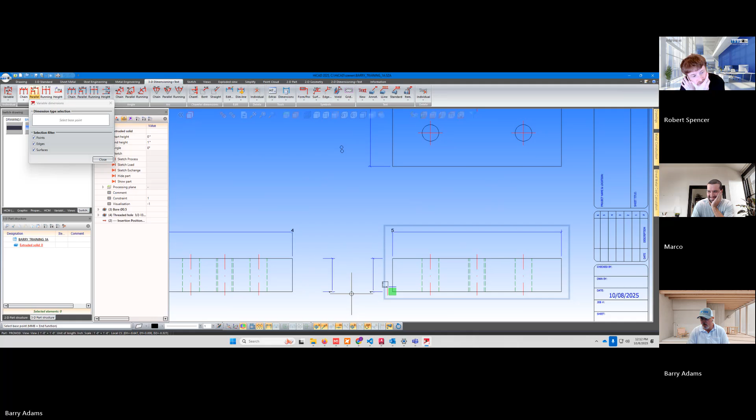Ah, is it still doing it? Oh my, yeah, and it's upside down now. Now it's right in that line. There's got to be a bug or a glitch. I probably just need to restart my whole machine. Probably, probably need to reinstall HiCAD at this point. It's probably because Marco's attached to this conversation somehow.

I'm fine with just moving forward unless you think we really need to address this. If it persists, then I would find that annoying. If it persists, we'll want to do something. I really do think because you can see I've got 10 million things going on at the same time.

So a lot of times you shut everything down, restart, and start with a fresh drawing, and things are good. Especially since it was doing it on my screen for a little bit, and then I screwed around with the defaults, activated, deactivated, did some stuff, and then it seemed to go away. So if I exit the command, I could still move it, so it's not like the end of the world right this second. Hopefully a restart helps. It could also be something, though I tend to say probably not - it could be the way your graphics card is interacting with something. I don't know, it could be causing interesting behavior, but seems like it's not.

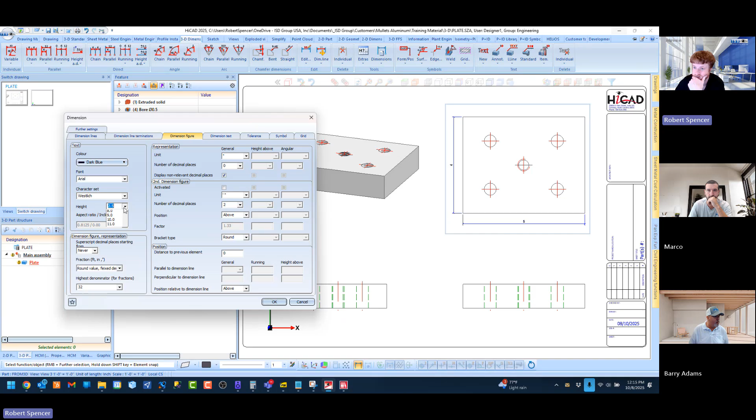Most anything you need is like a right click away. Yeah, a lot of things are. So you probably might have seen it, but here for a dimension figure you got font size - maybe you want it bigger yet, but anyway, that's where you change it. So most dimensioning, I think you got the idea. When it comes to your holes, it's more of the same, but remember from 2D, you got to be careful not to click the Z - you got to move it just a little bit further away so only your hole is activated.

And then based on where you drive your cursor, you get it out this side or going up or down. So, but we have to - okay, I see, well we don't want the Z. What are we looking for? Up? Quadrant? No, no - your circle will be highlighted. Yeah, just - oh, you see just my screen highlight right now, just the circle with no points activated. I see, I got it. Yeah, and you have to dance your mouse around a little bit to make that happen. Yep, we are good.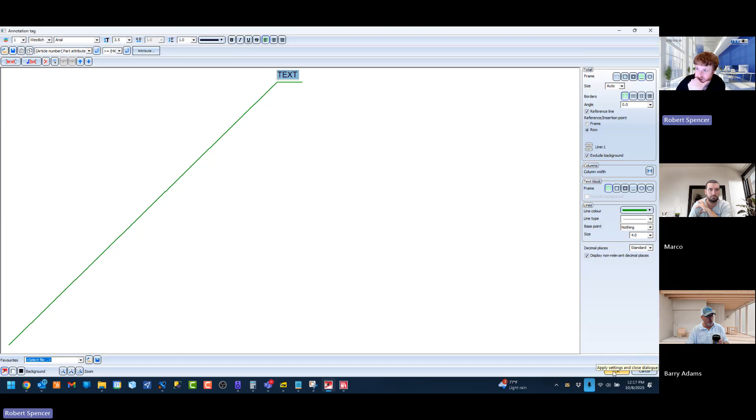Now, since this thread was done via a catalog item, it's a little special. For this one, we need to do an annotation. So up here in 3D dimensioning, we have annotation buttons. Let me just start by saying if we want to do just a standard annotation, we can do this one that says text. It's going to ask you to select the part - let's say I pick this part. And then you can type a text, but that's not typically what you'll do. I'll finish the command this way - you can type a text by giving it a position, and you get text there.

Now, what's better is let's say we actually want to utilize this article number, which has already been assigned for whatever you typed there. So if we double click, go back into this annotation - and I realize this is probably a lot - we can assign an attribute here. From the text or the part? You assigning that attribute to the part or to the text? To the text. I'm changing - okay, you're changing up the text. Let's back up for a minute. So this got you an annotation template. This will be used in a variety of situations.

Now you can type whatever you want, and that will show. Okay, cool, but when would you really do that? Well, sometimes you might, but what's better is that we utilize an attribute, for example for article number, because we already assigned an article number of plate or whatever you did when you made your part. So when I utilize a smart field like that, you see it adapts the article number into that field. We're gonna want to do that, I think. Oh yeah, for sure, you're definitely going to want to do that. Now let's say I itemize - okay, what the heck is itemizing? We probably haven't done that. Itemizing is creating...

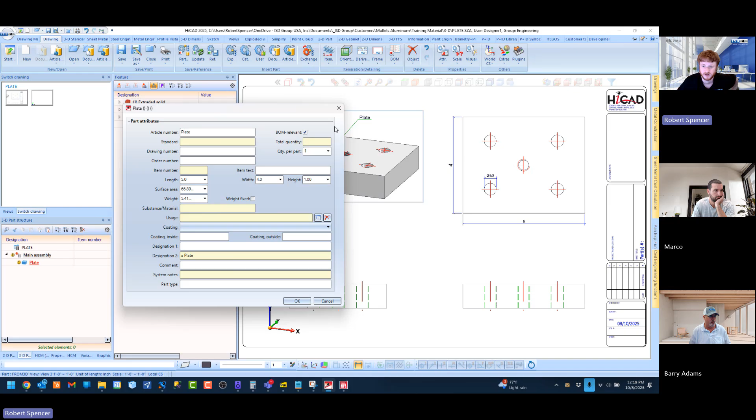You see, it did nothing. Let me explain why. For parts that have been set to be BOM relevant, that means you want that part or assembly to have a drawing, to receive a number, to be on the bill of materials, okay?

Say you're modeling something like an extruded solid to support your detail that you're making. You're not actually going to provide that solid to your client or anybody. You just want that in your model.

So you would model that as not BOM relevant, as a supporting part to the drawing. For provided parts, you want to click that. And now when I itemize, it's going to show a number up per predefined rule that's active, per a default rule. Now you can create different rules so that different parts receive different types of numbers, different increments, or you can also combine with letters.

You can do all kinds of powerful things with this itemization. But for now, we're just going to say, okay, a predefined number. So this plate, I believe the rule that's active right now is that generalized parts, which this is, starts at 1,000 and goes up from there. Why is it starting at 1,000? Because we've got tons of other rules for parts like sheet metal and steel, that start at 1 or 10 or 100 or 500.

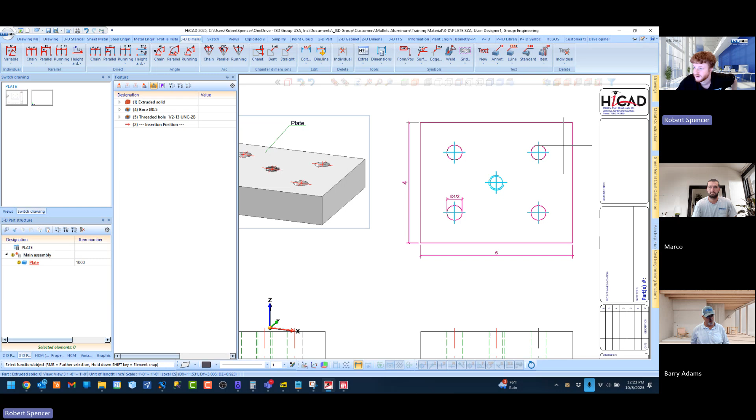Now, for this thread here, since the thread came from the catalog, remember when we made this, we went into our library and we pulled a standard size from the library. So this is going to need this standard. Let's see, it's doing something. You see, it's pulling that. Which, by the way, double click, let's look at it. Catalog designation is the field that it pulled, which, by the way, is here. So the only difference between those buttons is... okay, no, I'm doubling it. Let's not do that.

Is that the field that's loaded by default. Now you can create these. Everything in this menu, here you're going to see a common theme.

Looky here, save as favorite. It's just not a star, it looks a little bit different. And you can save everything in this menu as a text object. So a text object, it's going to save here in your sys directory, but you can copy them. You could create all these and copy them in a Marco system, and then he has all the same stuff that you just created, or vice versa. It's just called a text object, not a star favorite. It's just called a text object favorite here. Same thing, just a little bit different.

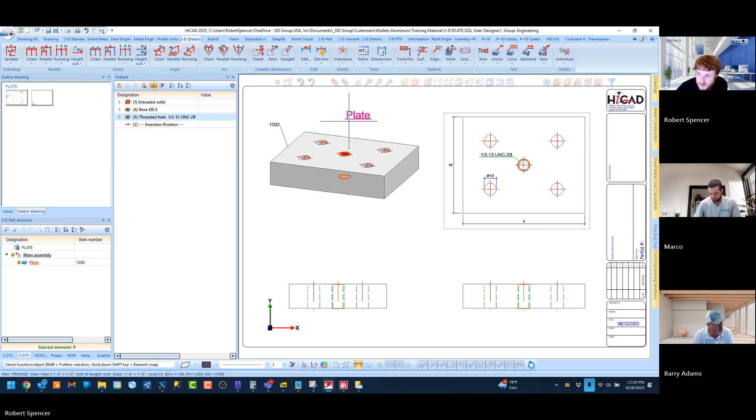These annotation callout templates are one of the few exceptions where we have to think about it ourselves. Slowly they're improving that, and I hope one day everything is in that configuration folder. Yeah, there should be one that does all standard user configs.

We almost could save it all — it's almost all. We have to think about a couple of things at the moment, but I hope they continue to improve that.

Can we store our configs, just the configs, on our user folder on the network? Anywhere — your PC, the network, OneDrive — it doesn't matter. You can take this, say open, and browse to anywhere on your PC or network drives. I'm at my house so I don't have network drives, but anything available from your PC works.

However, some processes in HiCAD look for things inside that sys directory. So what I tell my clients is, we'll do it together, you don't have to worry about it. Let's create a folder somewhere.

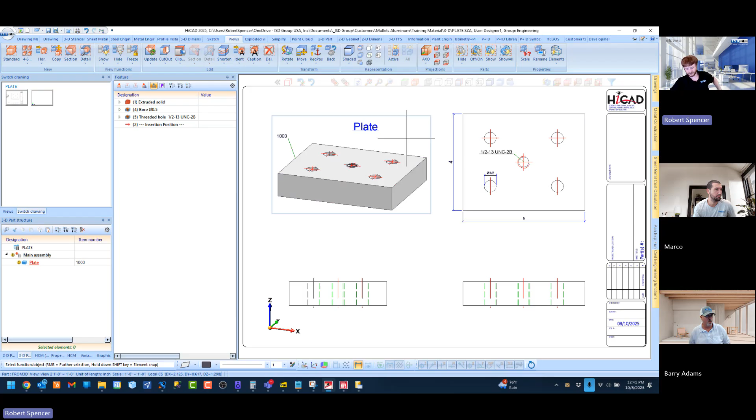It used to be that they didn't line up like that, and you might keep them linked together, whereas now you might unlink them. Previously, when that wasn't the case, you might catch yourself coming out here to 2D and quickly drawing a line like that, and then coming over here trying to align them up. They made some great improvements here in the past couple of years on that. We've all had to do that. For sure.

Oh yeah, that's what I was gonna try to get to. The drawing you just showed, that was the exercise I wanted to get to. Not that one, this one? Right, that one right there. I haven't been to that one yet. Did you do that one yet, Marco? This was one I was going to suggest you try on your own, because it'll exercise your sketching. We did something similar in 2D. You remember that? Yeah. But try that in 3D.

This book actually, I wrote this book to try to dummy proof it, because I wanted to be able to give this book to a prospect on a trial version where they haven't purchased any consultancy training, and I want them to be able to read through it and achieve success with the exercises on their own. Hopefully, and I'm always open to feedback, it walks you through exactly how you can do this. You can try the steps in the book, or try your own steps, that's fine too. But give that a try if you can, maybe before next time.

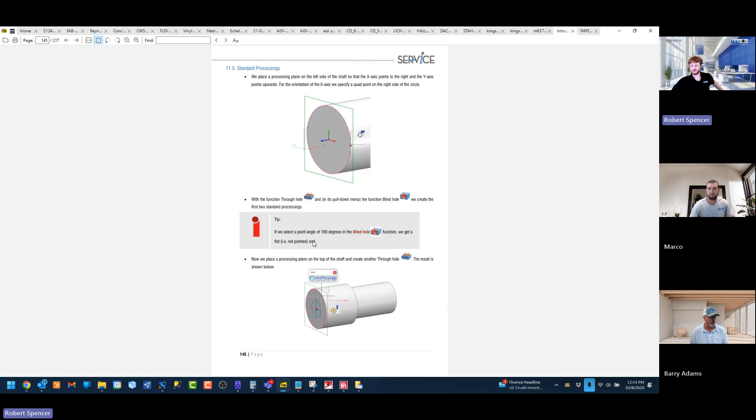Because what I want to do now is something very simple, but it shows you, it introduces an assembly, and it introduces fastening. So this is usually what I go to next. And then I usually don't do this part, but you can practice that on your own. It's a revolve. We got extrude, and we got revolve right next to it. Because then I want to come back here, because I want to start sheet metal, which is more along your business. So I want to do this one here, and then move on to sheet metal.

Okay. So we got a few minutes. We probably won't finish it, but let's just go for it here, for the last little bit. All right. So you can save this or not. Mine's already saved. And we're going to say new. Go ahead and close that one then. You can, you don't have to, but you can.

My computer fans are going crazy right now, and I don't really know why. I keep seeing this WSAPPX, which manages your Windows store and a bunch of stuff. It's been working quite a bit lately, and I don't really understand why. Seems like maybe a temporary cache, something's maxed out, and you could be leaking memory - it's just like a little mini dump to help it manage. Does that make any sense? Yeah, like a buffer overrun.

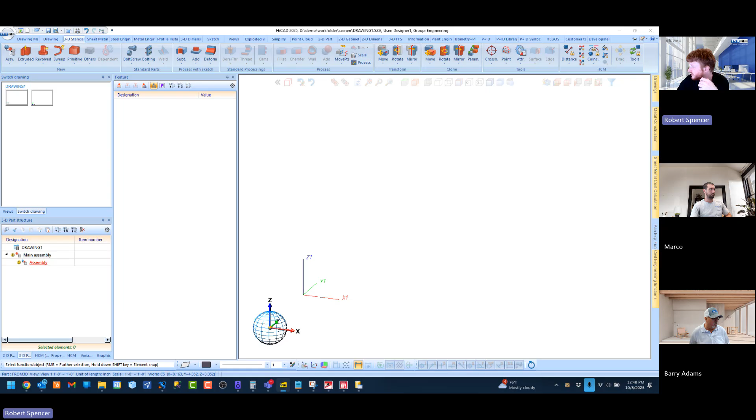Okay, so we got two assemblies set up here, and we want to just create a couple of simple parts. Here's another case where you could draw a sketch or use a solid primitive - what's the difference here? There's really not, so you can take your pick there.

I'll use the cylinder shape here for this one. This will behave like a cylinder with little thickness. The height of this here is 3/4, and the diameter is going to be 5.5.

I think I've started to figure out, Barry, when you're looking at your screen and when you're looking at mine. Now you're looking at mine. You're looking at yours a minute ago, right? Obvious, isn't it? Yeah, I'm already lost. Oh, okay.

What's wrong? Here, I'll just share. I accidentally created two, so I had to delete one, and by the time I was done you were already way past me. I'm trying to adjust it. Well, you're ahead of me because I haven't even created a cylinder yet.

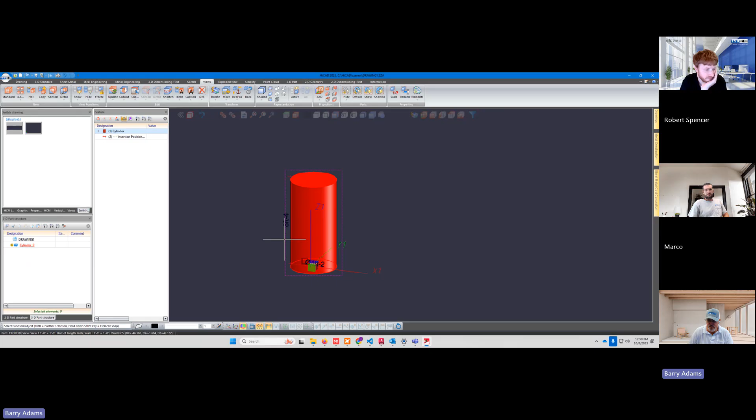So you created the wrong size cylinder - how can you edit that? I was trying to press enter, but that isn't doing anything. You either need to double click to return to the menu, or you can expand that right there to access the values.

You double clicked on it - that one, can you? You could also double click on that 8 feet 4 inches. Yeah, I guess we could do it like that, and dimension what you want. You said 5.5?

That's the height. And then the diameter was - oh, the diameter was 5.5, and the height was 3/4. Okay, so let's change that quickly. There you go. All right, I'm good now.

Now we needed to mirror that, make two of them. I'm getting ahead of us now - sorry. No, it's okay, go ahead, I'll give it a try. So where do you think the copy command might be? It's going to be right there with your other 3D tools.

You can also right click - make sure we're on the right part - you could right click on that part, and you see that clone kind of in the middle. Oh yeah.

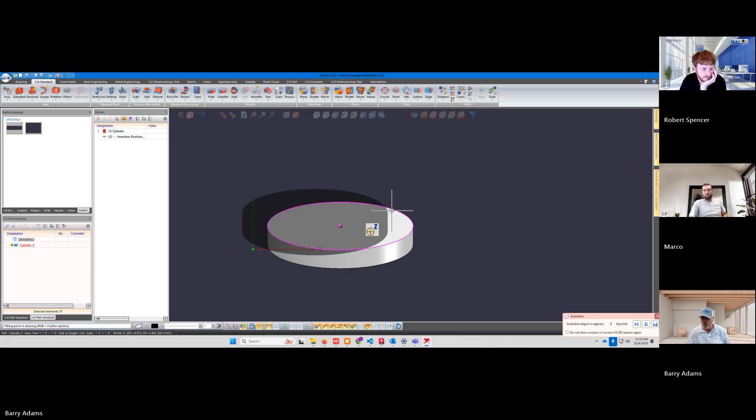And you want one on top of the other. So it's asking for you a displacement vector. I would either clone from the top to the bottom, or clone from the bottom to the top via the Z point. And just set it right there. Yeah, but you didn't snap to anything. You didn't snap to a point, so it looks a little funny.

Here, watch me for a minute. Okay. So, right click, clone. I want 2. Snap to Z, move up, snap to the other Z.

I can do it again. Right click. We're gonna snap to that Z. Bring it up. And snap to that Z. And that did not work.

All right, let me delete that part. I'm going to right click, clone, want 2, the plus, put it back in the same spot.

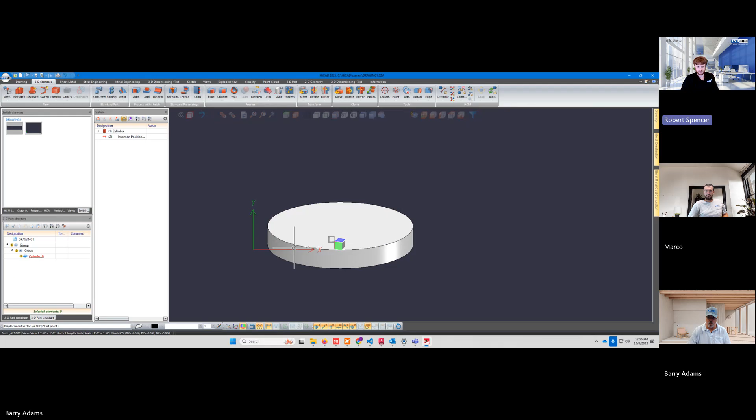Do you understand what you're creating, what you're doing this for? You're picking a point, you're cloning and moving, right? You're not just cloning, you're cloning plus transform. So you want to pick a start point and an end point for the move. So if you cloned it by the top Z, you could move it then to the bottom and it would copy down. If you moved it from the bottom Z, you could copy up.

Okay, does that make sense? That's my problem. I should have cloned it from here. Like that. See, I told you it was that easy.

It is simple, but if you don't know the actions, then it's not so simple. We'll try it. Yeah, so it would be a matter of we would just clone this. We would just take it from this to there. And that way we're still... that makes a whole lot more sense.

So looking at your structure there, I think we might have done something interesting there. Just delete all this. Because it created what's called a dummy part, also called a group. A dummy part is there strictly for organization. It doesn't have any real properties associated with it. It's just for organizing. It's not a real assembly.

But let's explore how we can fix this. Okay, remember back a few moments ago, I showed you how to create a main assembly and an assembly. Did you get a chance to try that? It might have been too quick for you. I'm sorry about that. I don't think I did.